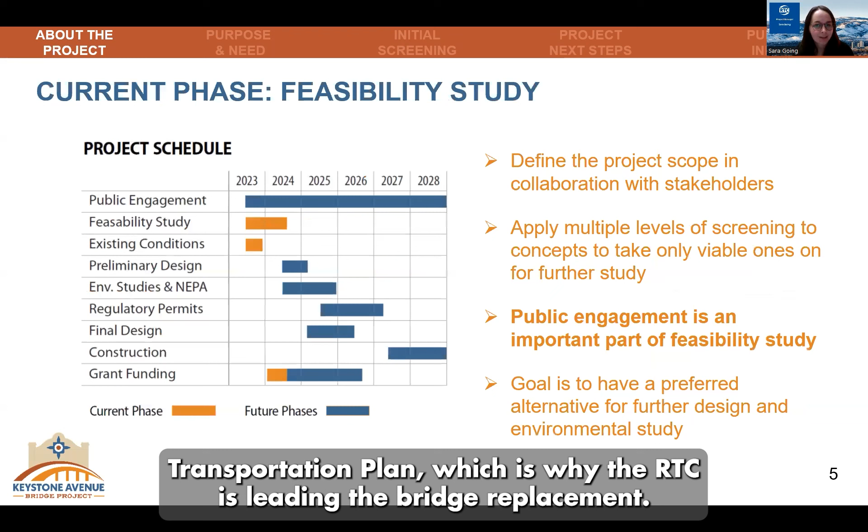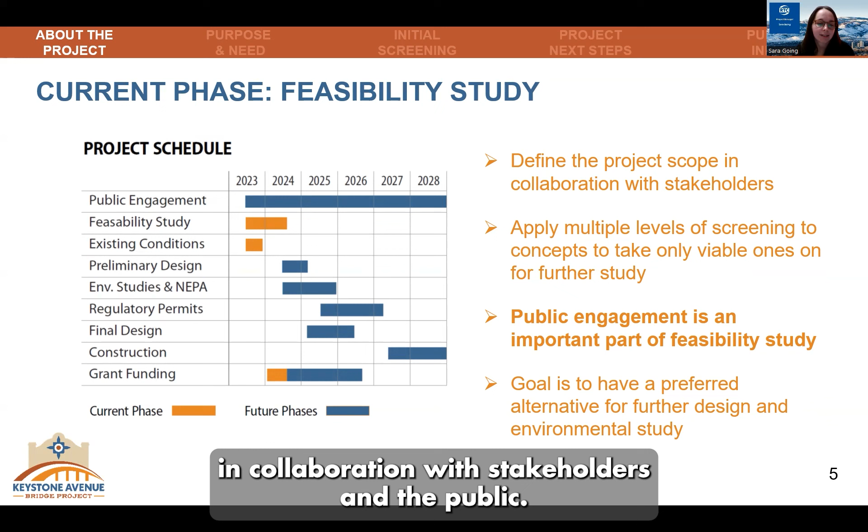So this is our first public meeting for the bridge, but there's quite a bit of background in the project area. The Federal Highway Administration and the Nevada Department of Transportation have allocated funding for the bridge's replacement, but we're also considering some past studies, including the 2014 Keystone Avenue Corridor Study, as well as Truckee River flood management plans and what they have in the project corridor. The project work has also been identified in the 2050 Regional Transportation Plan, which is why the RTC is leading the bridge replacement.

The current phase of the project is the feasibility study, which is going to define the project scope in collaboration with stakeholders and the public. This feasibility study will apply multiple levels of screening to all the project concepts to make sure that only viable concepts are taken on for further study.

Public engagement is a really important part of this feasibility study, so I really appreciate you tuning in to watch this video. The goal of the feasibility study is to end with a preferred alternative for further design and for full environmental study. It will take place over about a 12-month period through the first half of 2024.

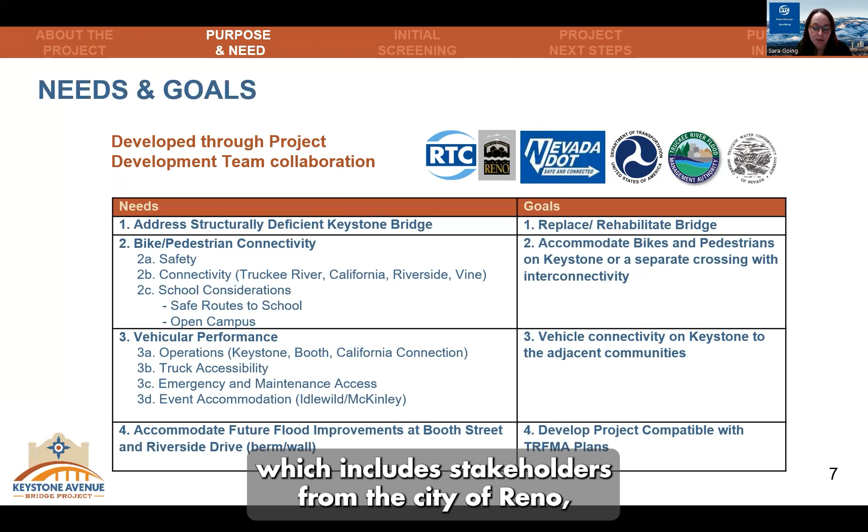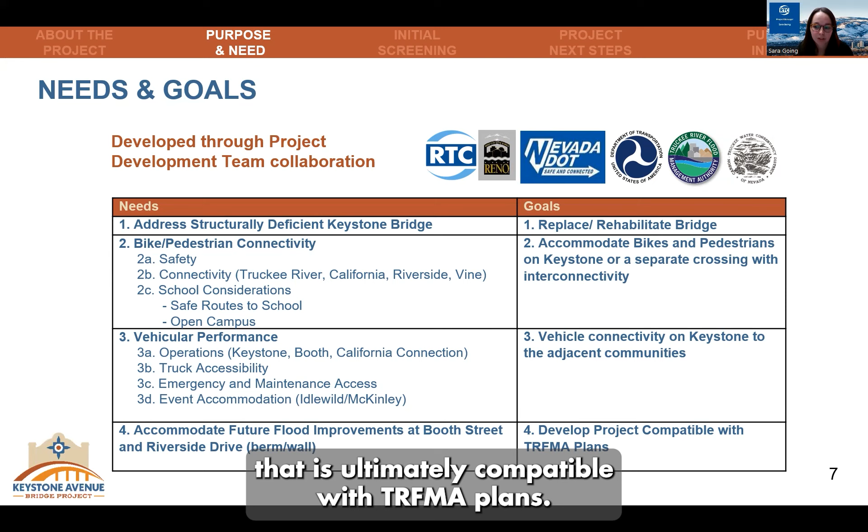Let's talk about some of the needs and goals of the project. The 4 goals shown on the screen here were developed in collaboration with the project development team, which includes stakeholders from the City of Reno, the Nevada Department of Transportation, and the Federal Highway Administration, as well as the Truckee River Flood Management Authority. Some of those goals include replacing and rehabilitating the bridge, accommodating bikes and pedestrians on Keystone, vehicle connectivity on Keystone, as well as a project that is ultimately compatible with TRFMA plans.

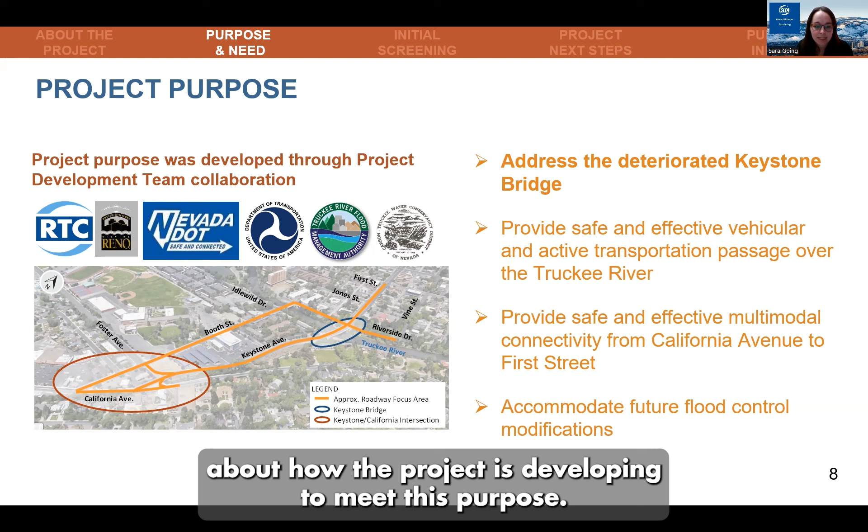These needs and goals feed into what is the project purpose. Since the bridge will be in place for a long time, the project team is also reviewing the connectivity to the north and south of the bridge to make sure it serves all the transportation needs of the community now and well into the future.

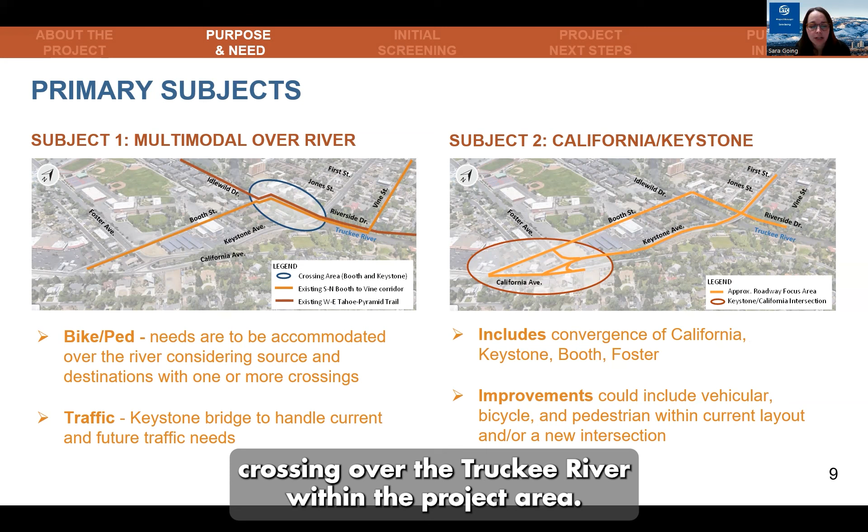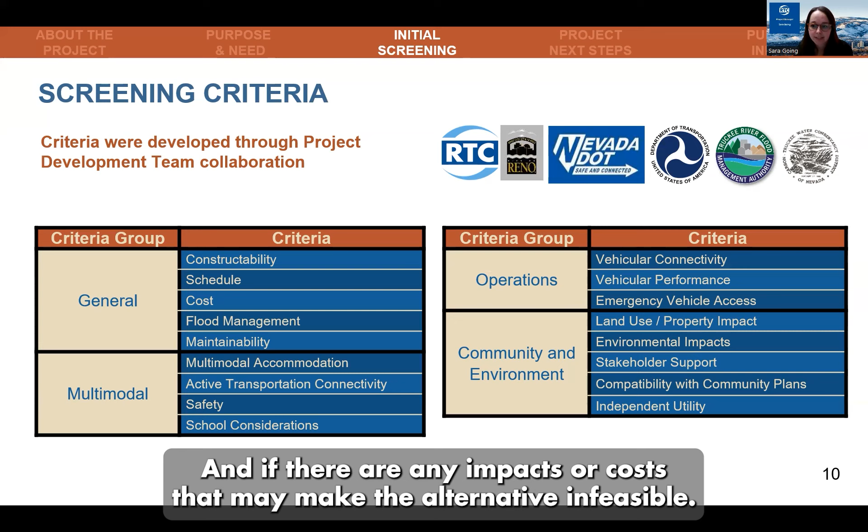So let's talk a little bit about how the project is developing to meet this purpose. The project team is starting by screening 2 primary subjects in the project area. Subject 1 considers the needs of all modes crossing over the Truckee River within the project area. Subject 2 focuses on the convergence of Booth, Foster, Keystone, and California on the south side of the Keystone Bridge.

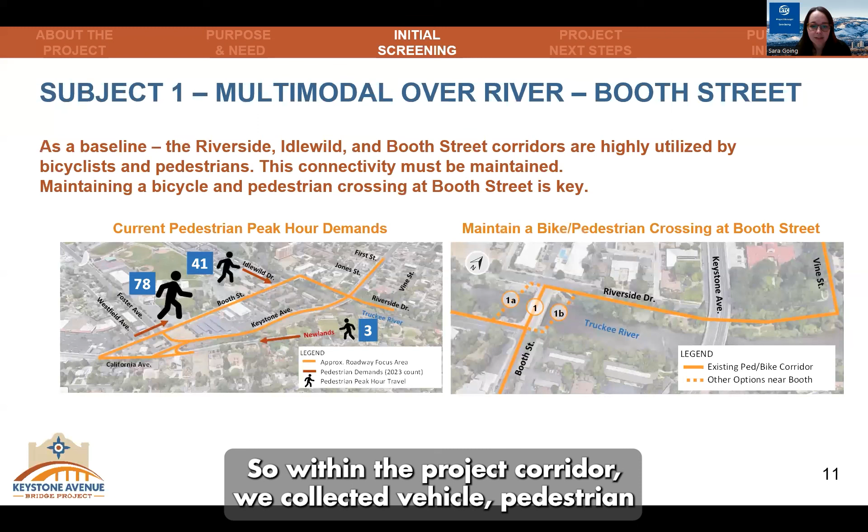To evaluate each of these subjects, we're using screening criteria, and these allow us to assess how well each alternative meets the needs of the community and if there are any impacts or costs that may make the alternative infeasible. Some of these criteria include constructability, overall cost, safety, environmental impacts, property impacts, and stakeholder support.

We'll start with subject number 1.

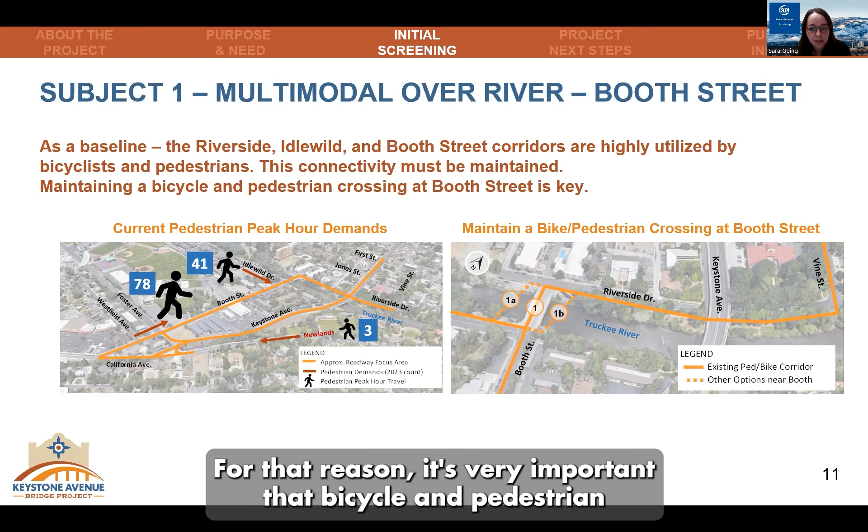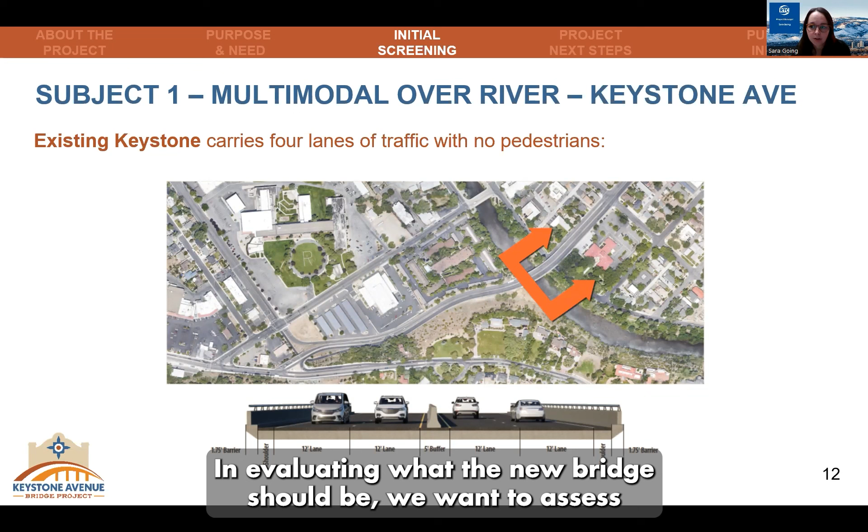Within the project corridor, we collected vehicle, pedestrian, and bicycle data, and this was used to guide our process. We see that the highest traffic volumes are along Keystone Avenue, which connects the residential Southwest Reno community up to Interstate 80. We see the highest pedestrian and bicycle volumes on Riverside Drive and Booth Street. For that reason, it's very important that bicycle and pedestrian connectivity is maintained from Riverside Drive to Idlewild and Booth Street.

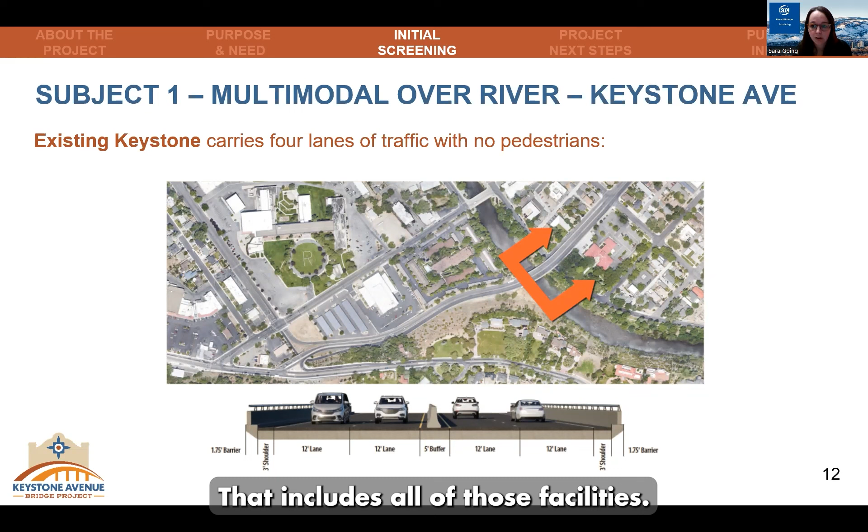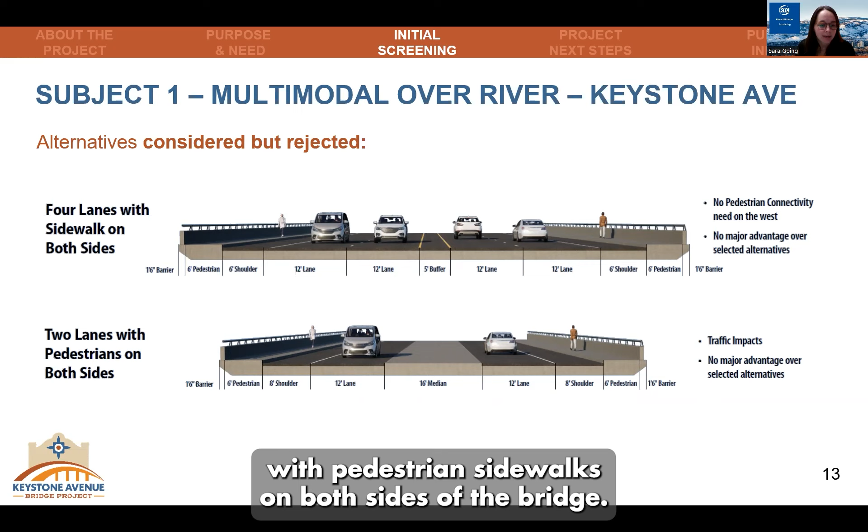The existing Keystone Bridge itself has 4 lanes of traffic with currently no pedestrian or bicycle facilities. In evaluating what the new bridge should be, we want to assess the benefits of accommodating bikes and pedestrians on the new bridge, and also understand what the impacts of a potentially wider bridge might be that includes all of those facilities.

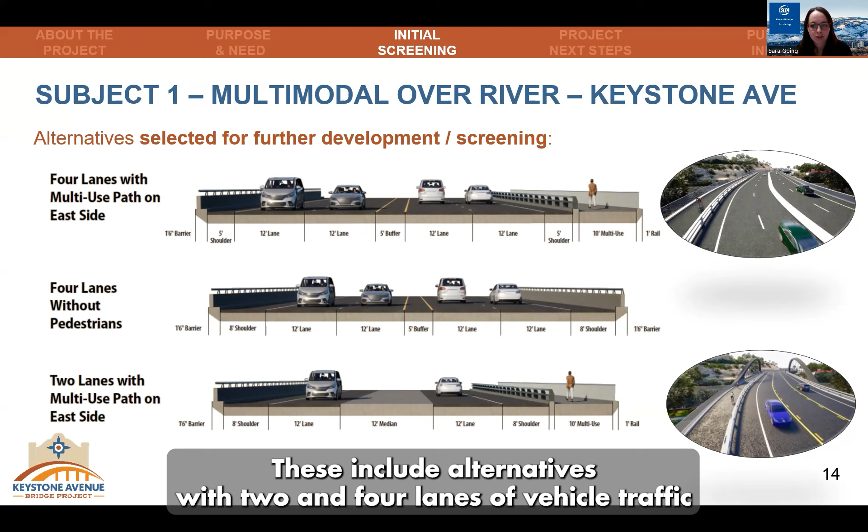Some bridge concepts that we considered but were ultimately rejected include a 2-lane and a 4-lane section with pedestrian sidewalks on both sides of the bridge. When we consider the bicycle and pedestrian circulation in the area, we can see that the west side sidewalk does not really provide a significant benefit in access or connectivity compared to the costs associated with providing that. For this reason, an alternative with sidewalk on both sides was not advanced to the level 2 screening.

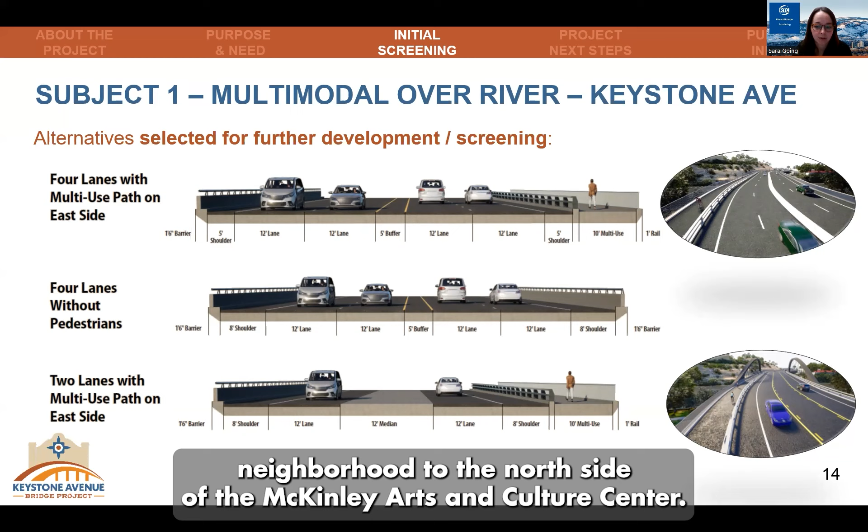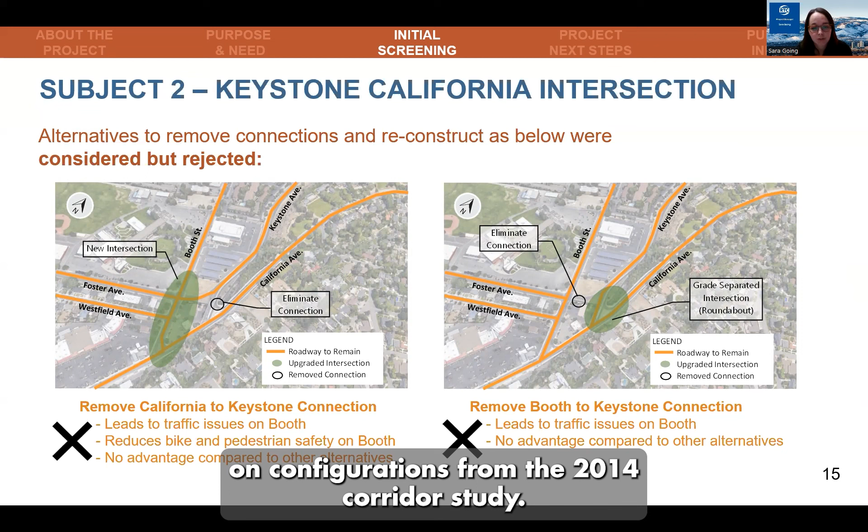Based on the screening criteria, the project team narrowed the concept down to 3 alternatives for further development. These include alternatives with 2 and 4 lanes of vehicle traffic. For both lane configurations, we'll study a multi-use path on the east side of the bridge. This path would link the Newlands neighborhood to the north side of the McKinley Arts and Culture Center.

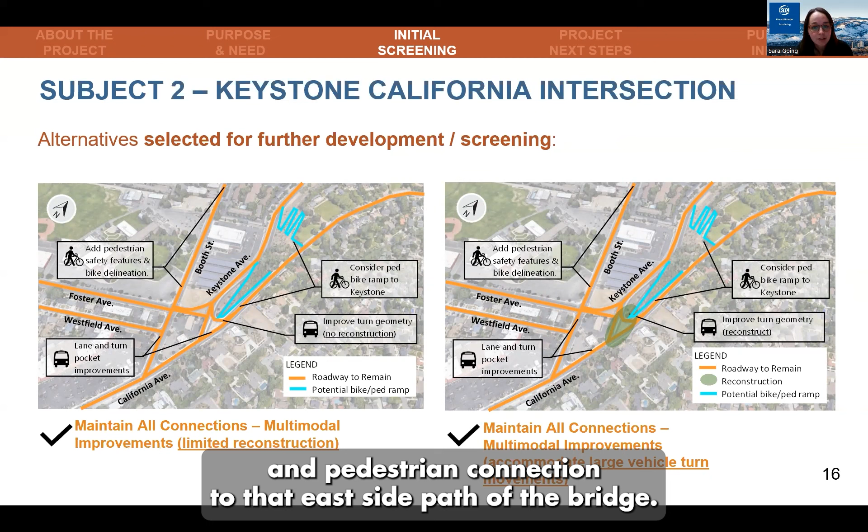Subject 2 considers the Keystone and California intersection. We studied several intersection modifications, some of which were based on configurations from the 2014 corridor study. Some of these that were considered but ultimately rejected included removing direct connections from Keystone Avenue to Booth Street and Keystone Avenue to California Avenue. These were rejected due to the high costs and also the unacceptable traffic delays.

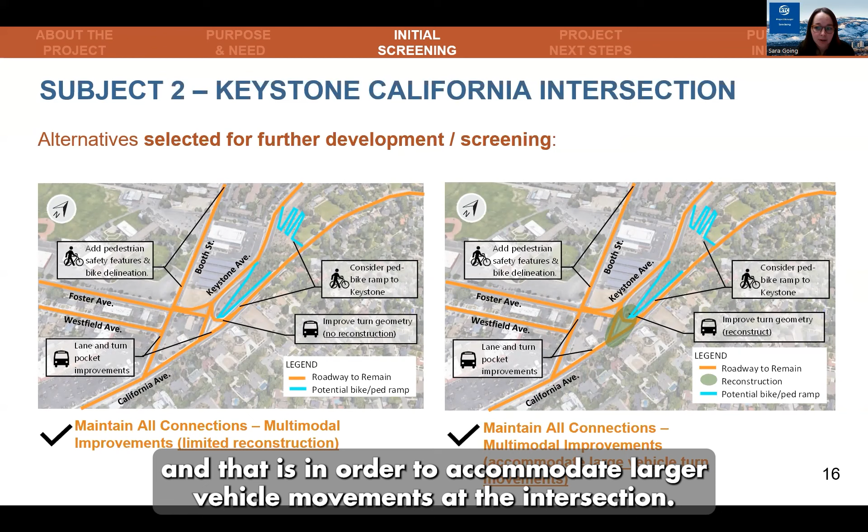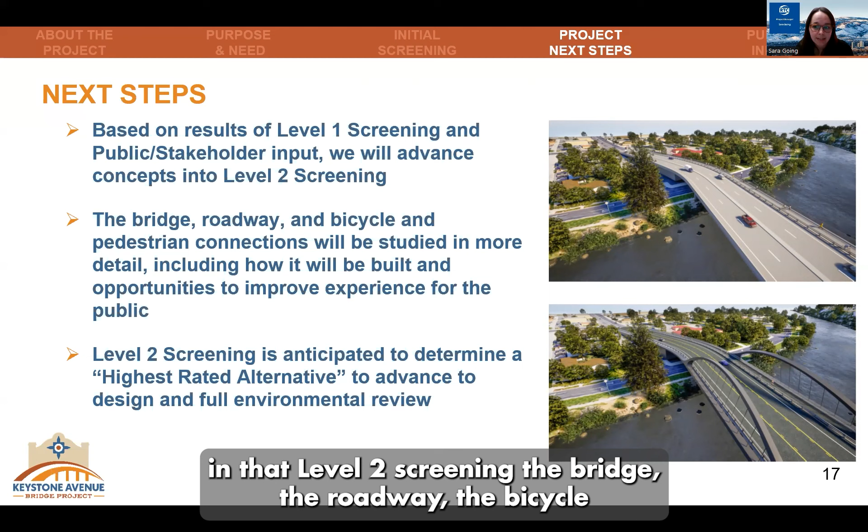Options that maintain all existing connections will be carried forward for more study. Both of these options will include bicycle and pedestrian improvements and potentially a new bicycle and pedestrian connection to that east side path on the bridge. The primary difference between these options is the extent of construction at California and Keystone Avenue, in order to accommodate larger vehicle movements at the intersection.

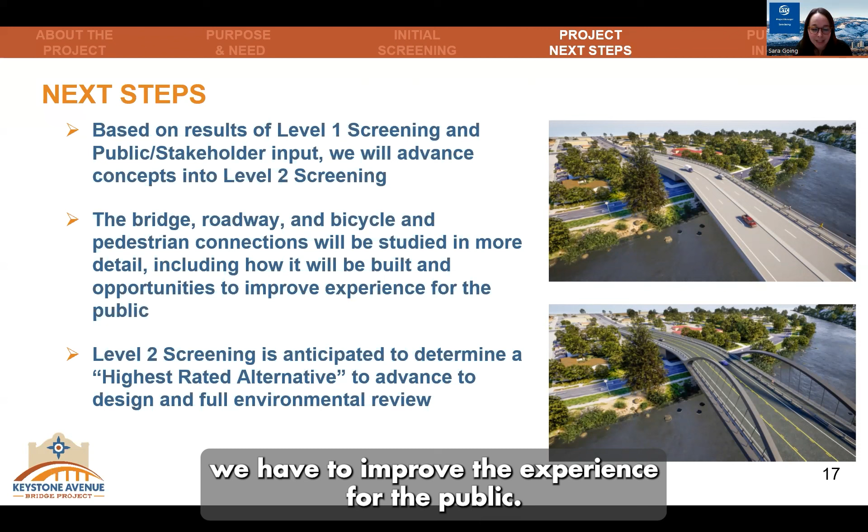So what are the next steps for this project? Based on the results of the level 1 screening and the public and stakeholder input, we're going to advance these concepts into the level 2 screening. In that level 2 screening, the bridge, the roadway, and the bicycle and pedestrian connections will all be studied in more detail, including how they're going to be built and any opportunities we have to improve the experience for the public. Level 2 screening is anticipated to determine a highest rated alternative, and that is what we would like to advance on to design and full environmental review.

An important part of this project stage is getting input back from the public. There are several questions we would really like feedback on, and you can go ahead and submit your feedback on keystonebridgeproject.com through December 28th, 2023.

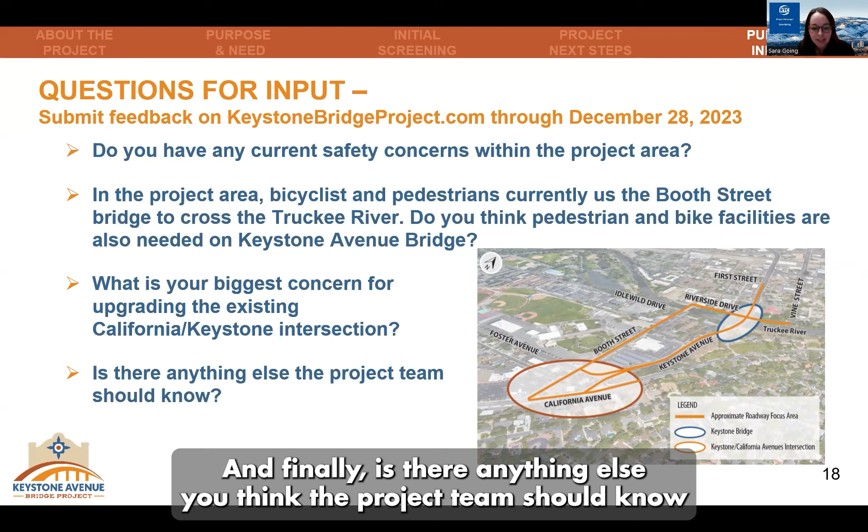Some of these questions that we would like to ask are: do you have any current safety concerns within the project area? Also, considering that bicyclists and pedestrians currently use the Booth Street Bridge to cross the Truckee River, do you think that pedestrian and bike facilities are also needed on the Keystone Avenue Bridge? What is your biggest concern for upgrading the existing California Avenue and Keystone Avenue intersection? And finally, is there anything else you think the project team should know within the project area?